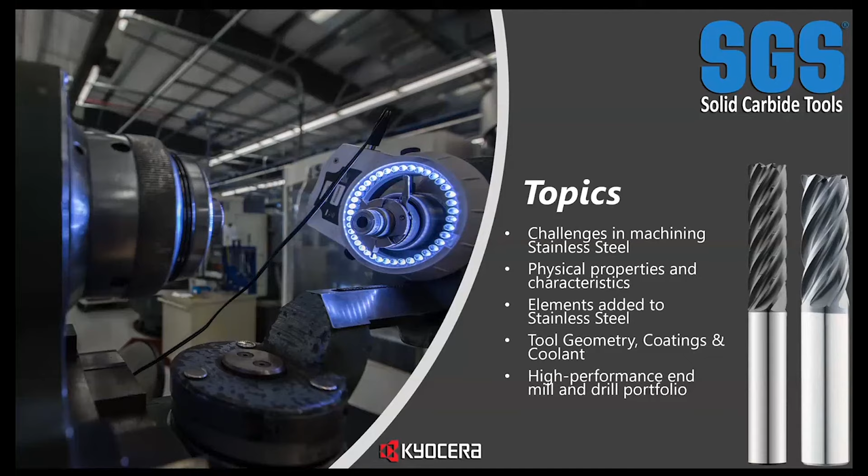So for a material to be classified as stainless, there has to be a 10.5% chromium and 1.2% carbon content or less. The base material here is iron, and certain amounts of other materials or elements are added to change the unique physical properties to suit the needs of each industry or market. For example, materials used in food and medical applications have properties that allow it to be easily cleaned or sterilized. The oil and gas industry or energy industry, on the other hand, uses stainless with additives to protect against highly corrosive liquids and high heat and pressure.

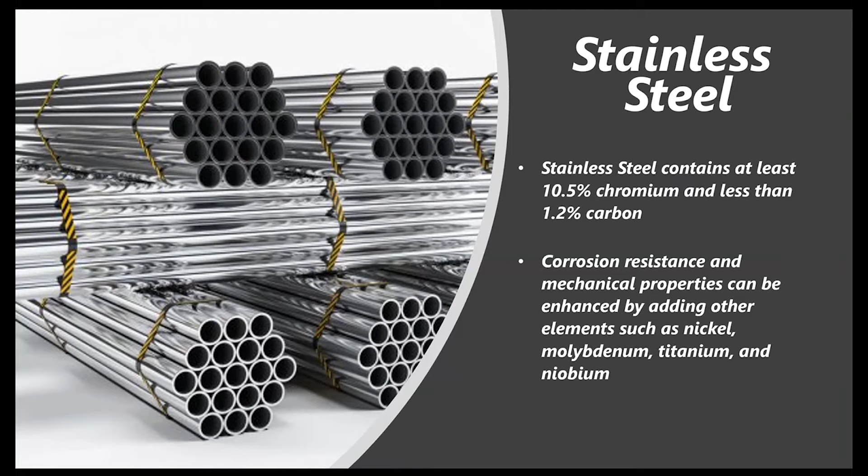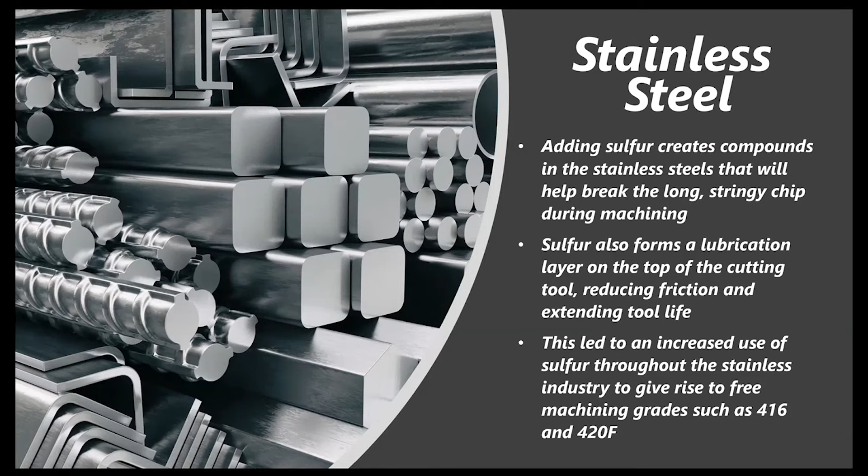So even the automotive and home appliance market uses the stainless steel for the durability and the aesthetics. Depending on what elements are added and how much dictates the tensile strength, melting point, oxidation, and corrosion resistance for each type of those stainless. Sulfur is added at low levels to improve machinability and formability. It will form sulfide inclusions in the material, but these inclusions act as chip breakers. It aids in lubrication by forming a thin layer at the cut surface. The additional sulfur allowed the creation of some more common 400 stainless steels and is used generally with the F designation at the end.

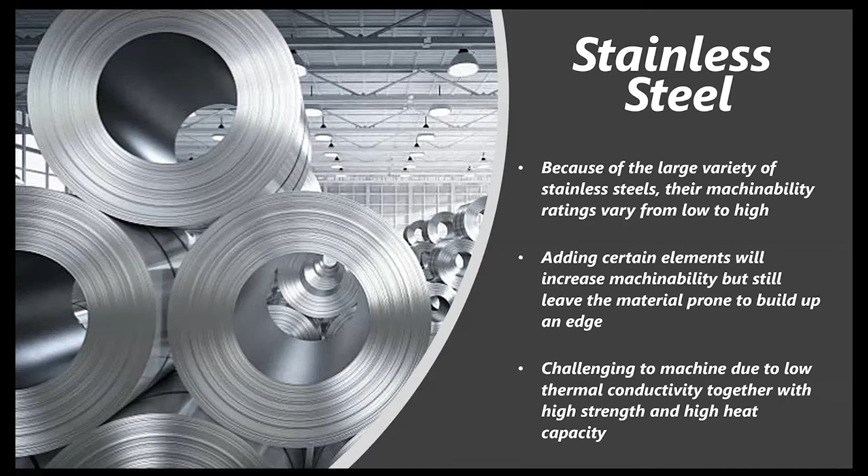Machinability varies greatly in different types of stainless steel depending on the elements added. A condition called built-up edge is when the material adheres to the cutting edge and is usually caused by low cutting speed and work hardening of the material at the point of cut. Increasing the shear or rake angle and the RPM will aid in heat creation, but there are many other dynamics in each type of stainless steel.

Thermal conductivity is the ability of a material to transfer or conduct heat. This is one of the major factors in machining stainless steel, since it has a very low ability to create the heat necessary to form and break a proper chip. So in machining a workpiece with poor conductivity, an increased amount of heat transfers into the tool. This supports the importance of proper coolant flush to carry away heat and chips, and tool coatings, which act as a heat barrier between the tool substrate and the material being cut.

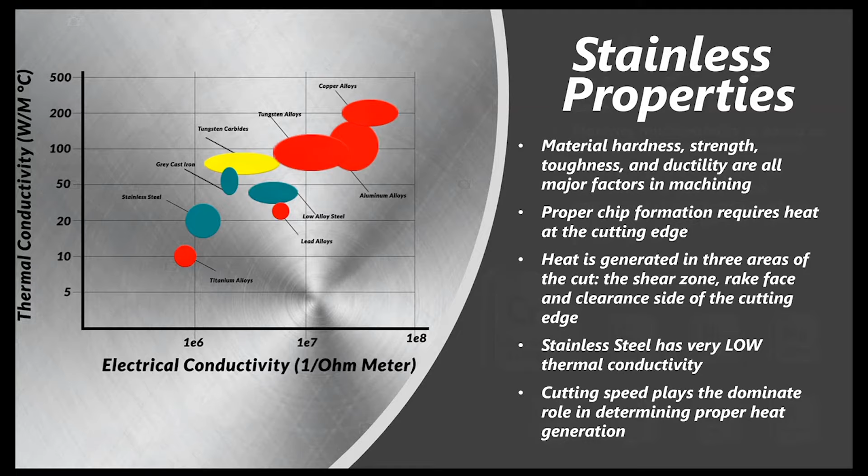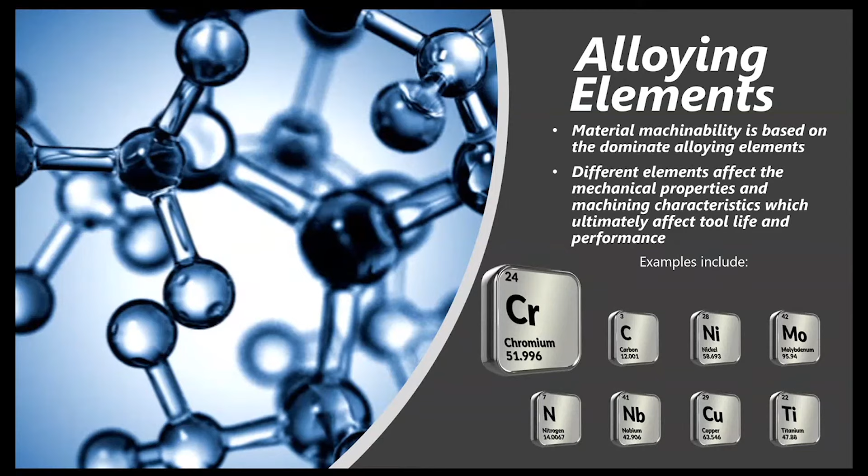So moving now into the elements added to each base material to form the various types. All of these alloying elements can be found in the periodic table. Added in different amounts and at different stages of the material development, each one gives the material the different qualities desired. As more and higher amounts of the elements are added, tool parameters decrease and tool life can be compromised. Of course, first up is chromium. I said earlier that a material must include a minimum of 10.5% chromium to be classified as stainless.

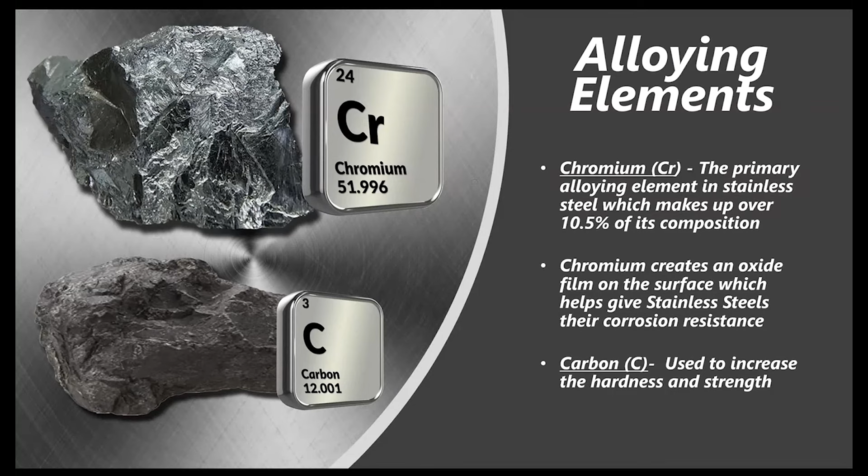During the metal cutting process, iron on its own combined with oxygen creates iron oxide, which is basically rust. When chromium is added, the material has the ability to create a passive film called chromium oxide. This basically stops the formation of rust and creates an immediate barrier when exposed to oxygen. This is the base of all stainless steels. Carbon is added in low amounts to certain types of stainless to increase the hardness and strength. Low carbon types like 304L are used often in welding situations.

Nickel is used in stainless to increase its resistance to heat and corrosion. This can lead to poor chip formation at higher levels and increase the cutting temperature even higher than chromium alone. So adding molybdenum improves the resistance to pitting corrosion, meaning it can be used in more aggressive environments like pharmaceutical equipment, outdoor fixtures and hand railings, marine parts and fittings. The downside is the material has an increased ability to work harden, and sharp geometries are the most effective here.

Nitrogen is used in place of carbon in high strength austenitic stainless steels. Nitrogen has a greater solid solubility than carbon and is a strong stabilizer. It also improves resistance to pitting corrosion.

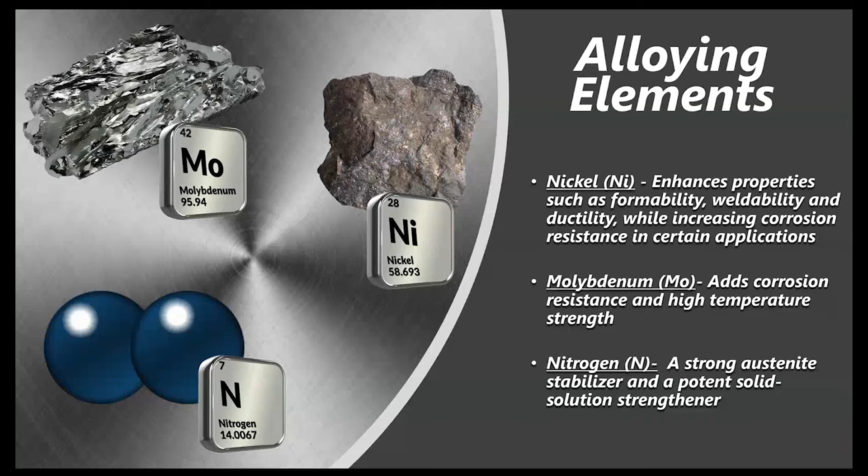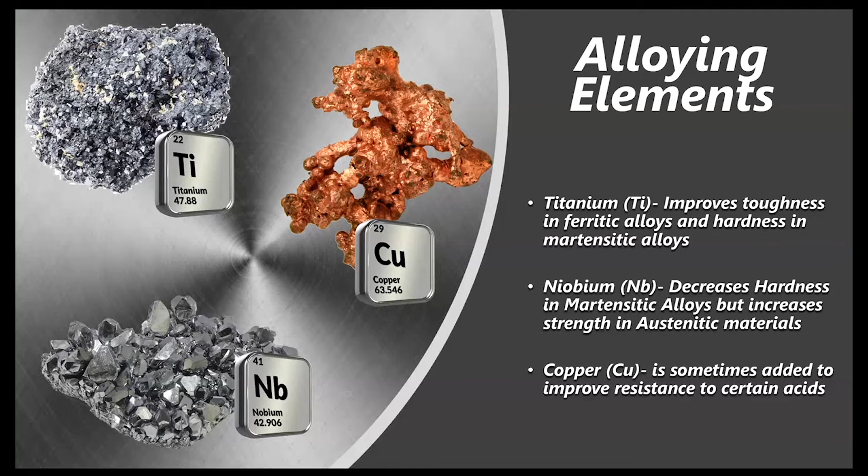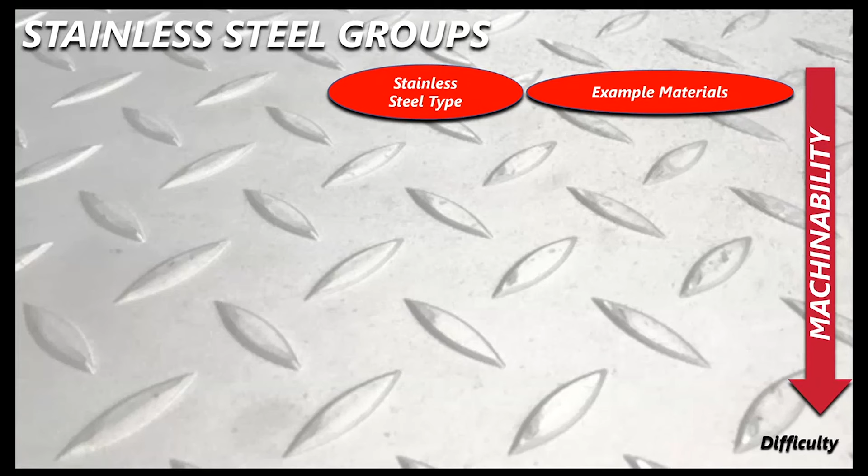Okay, so here's how some of these different types of stainless steels are formed. These are really defined by the alloying elements and the material's grain structure in the end. As I said, the base to all stainless is iron. When we add chromium, we now have ferritic stainless. These are classified in the 400 series, usually with 10 to 30% chromium, and have excellent corrosion and high temperature oxidation resistance. They cannot be heat treated and are always magnetic. So typical applications for this type of stainless include automotive exhaust systems, heat exchangers, and furnaces.

When we take that ferritic material and we add carbon, we get martensitic stainless. Because of its chemical composition, they can be hardened and strengthened through heat and aging treatments. These methods make martensitic steel stronger than other types and a good choice for fabrication of medical instruments, mechanical valves, turbine parts, just to name a few. The PH stainless falls into this type as well.

So we take that martensitic and we add nickel to the mix. We get austenitic type stainless steel. These are classified in the 200 and 300 series usually, and are the most popular grades of stainless steels produced due to their excellent formability and corrosion resistance. They're really used a lot in automotive trim, cookware, food and beverage equipment, and a variety of other industrial applications.

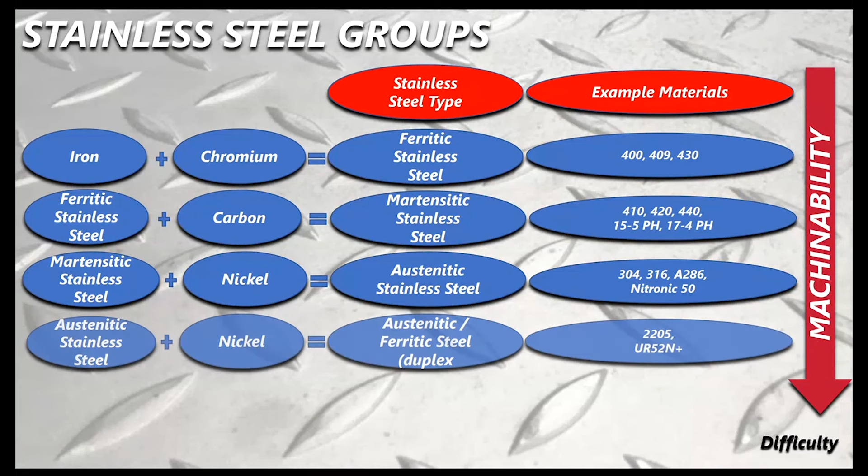Duplex stainless steels are called duplex because they have a two-phase microstructure consisting of grains of both ferritic and austenitic stainless steels. They are almost always double the strength of regular austenitic or ferritic steels alone and have very good stress corrosion cracking resistance. They're used extensively in the oil and gas industry.

Finally, the super austenitic type. These fully austenitic grades give excellent corrosion and stress cracking resistance. They may also be a lower cost alternative to nickel-based alloys, depending on the application. Super austenitic grades are usually for wastewater treatment and chemical applications.

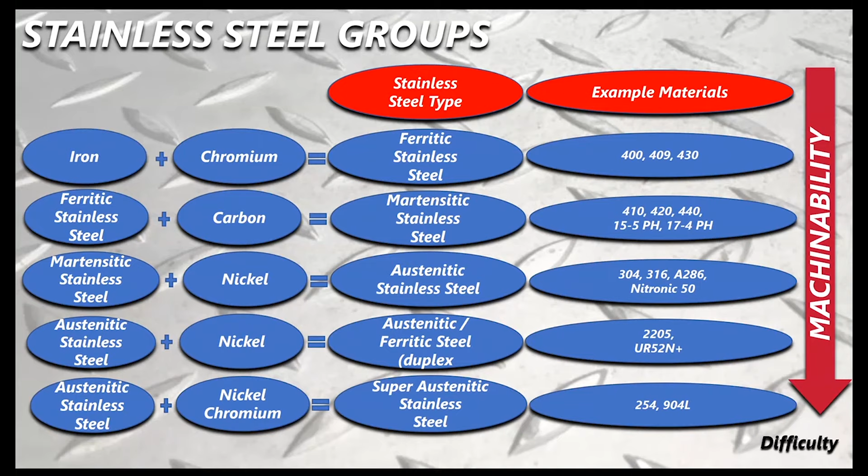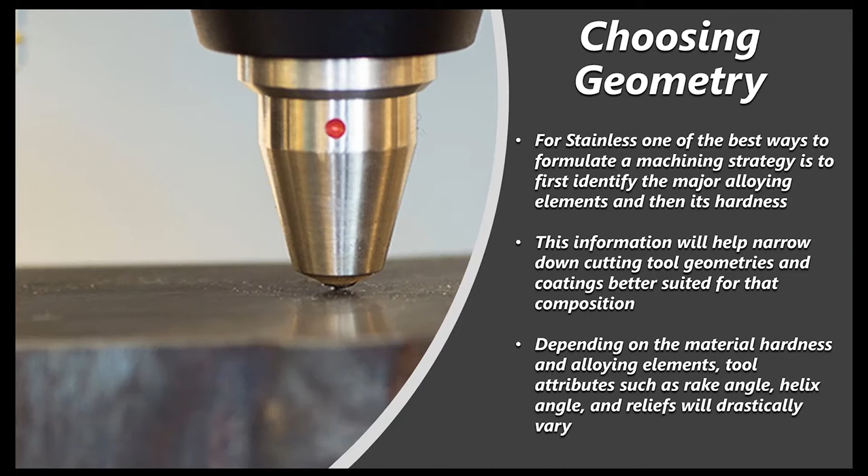So to choose the correct geometry for any stainless, we need to understand the content and type of alloying elements that are going into it. Hardness and toughness will always be an important factor. Once we understand those traits, we can apply that knowledge to identify the cutting tool and the type of tool path we need. The tool's attributes can help or hinder the ability to make or break a chip. The coating is also really important for added lubricity and to reduce the amount of heat back into the tool.

We generally apply a positive rake to stainless steels. This sharper edge will shear the chip and reduce friction, which in turn will reduce heat at the cutting zone. If the tool is too sharp though, we sacrifice the edge strength needed for added tool life. So we have to find a balance for the two features for best results.

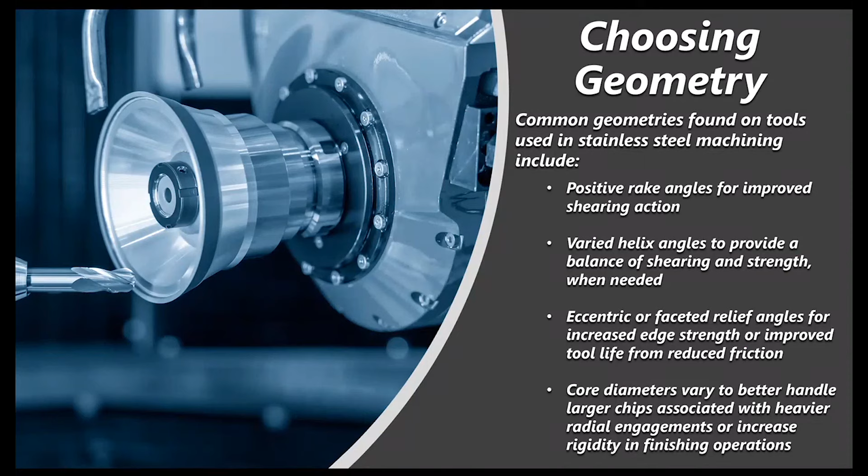Eccentric ground relief angles provide additional strength and give a sharper cutting action. Traditional facet reliefs are much sharper and will work for a short time, but they wear quickly and they reduce tool life. So variable geometries like unequal flute spacing and changing helix angles reduce vibrations and enhance the tool's performance. Flute count is usually based on tool path and type of operation for balance of maximum material removal and tool life. Using high efficiency trochoidal tool paths will reduce the amount of heat generated and can be very effective in machining stainless steels.

The coating on a tool has a few different functions, but in the case of tough stainless steel, we use it as a heat shield. Uncoated carbide exposes the substrate and heat will quickly break down the binders in the carbide. We also use advanced PVD and nano coating to create that slick surface for the chip to slide across, and that in turn reduces heat.

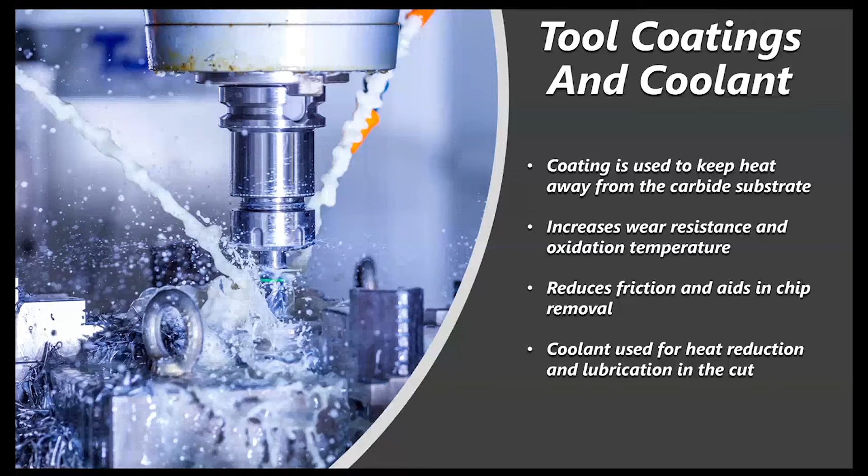Coolant should be applied when machining stainless whenever possible. Using coolant ensures that the friction between the surface of the cutting tool and the material is reduced, and lubrication significantly enhances the metal removal process.

So I mentioned earlier that we grind and coat over 11,000 tools a day. At SGS, we also have our own coating chambers and formulas. Everything is manufactured and coated under one roof. We offer several high-performance coating solutions that work well in stainless.

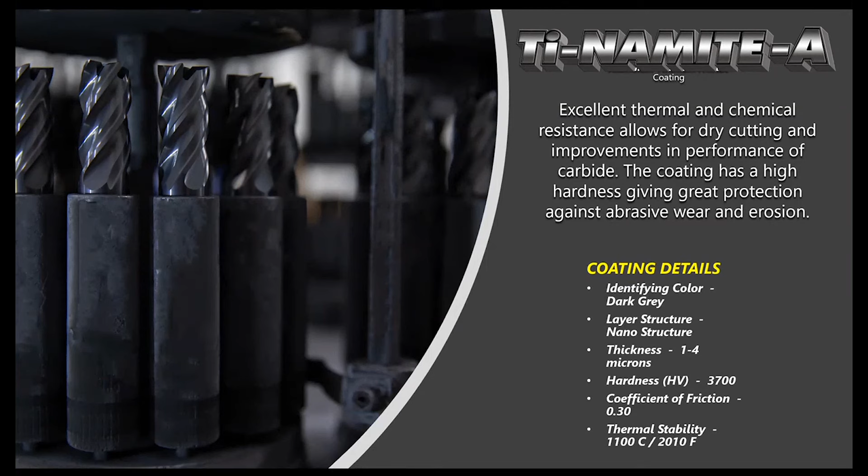The first one is what we call our Ti-NAMITE-A, or TA. This is an aluminum titanium nitride nanostructure PVD coating. This coating provides a very thin, hard heat barrier. It gives added protection from erosion and abrasion. It's perfect for machining stainless steel.

Ti-NAMITE-X, or TX, is our proprietary high-performance nano composite hybrid. It works well in a wide range of materials and applications. It can also withstand high cutting speeds and temperatures.

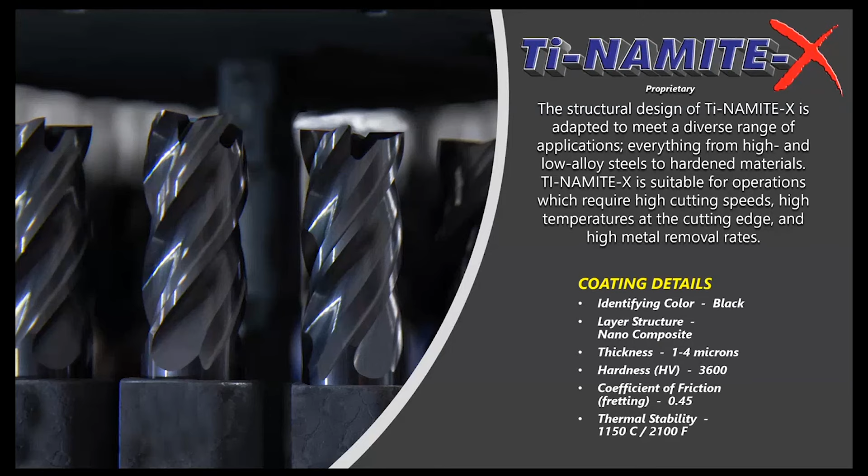And finally, this is our proprietary Ti-NAMITE-M, or TM. It's based on a titanium aluminum silicon nitride, and it's easy to identify by its color. That will also offer high hardness for protection against erosion and abrasion. And it's an excellent choice in machining titanium and stainless steel.

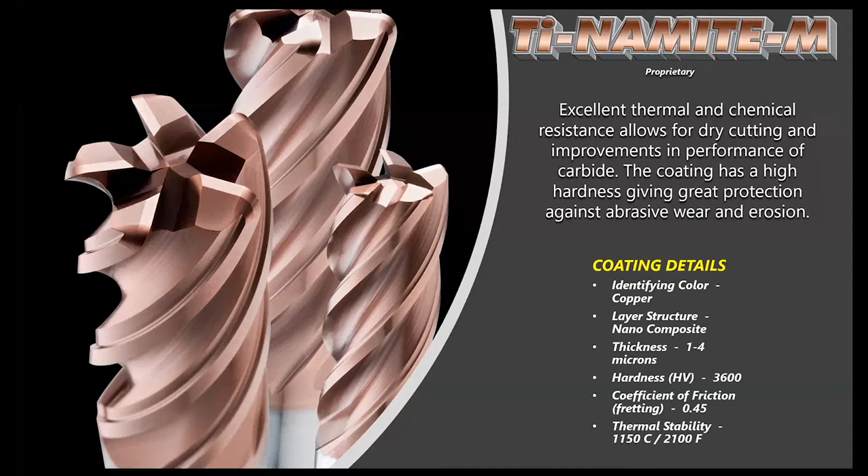So I'm going to move now into the SGS portfolio of high performance tools that we can apply to the stainless. Each one has different advantages over the other depending on the application and the type of tool path we'll be using.

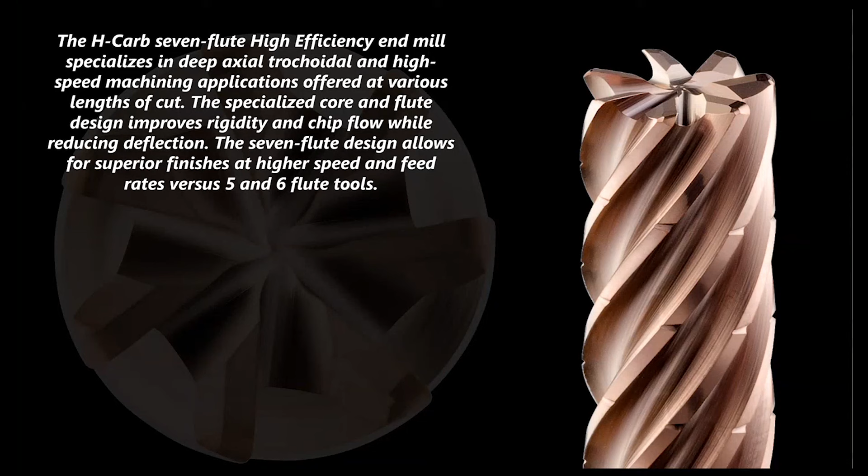First up is our most recent addition to the SGS family of high performance end mills. This is the Series 77, or what we call the H-carb. This 7-flute end mill has an eccentric grind with variable flute spacing. The tool has an optimized core diameter for increased rigidity in the longer lengths of cut. We also offer this tool with chip breakers as a standard. This will aid in stainless steel and create a smaller, manageable chip.

So this end mill is designed to be coupled with the latest CAM software that utilizes the constant cut method of programming. Software has many variations or names, but a few common ones are Mastercam's dynamic milling and GibbsCAM volume mill. Another common term used is trochoidal milling, where the end mill uses a circular motion to create a large swath or slot.

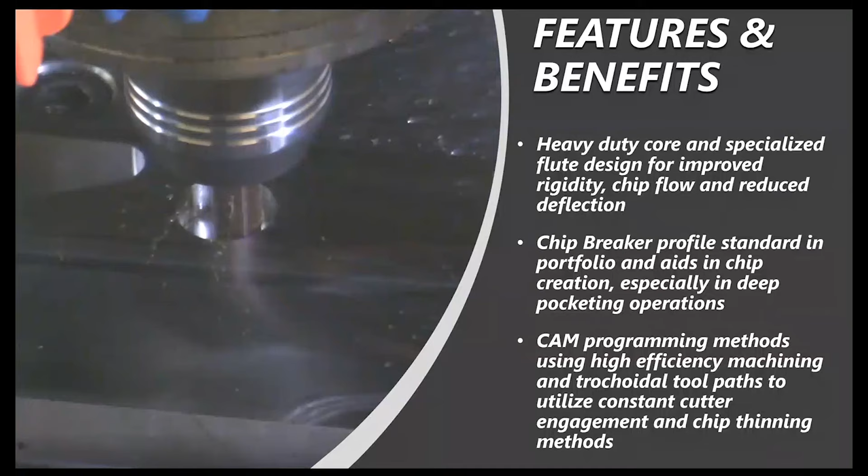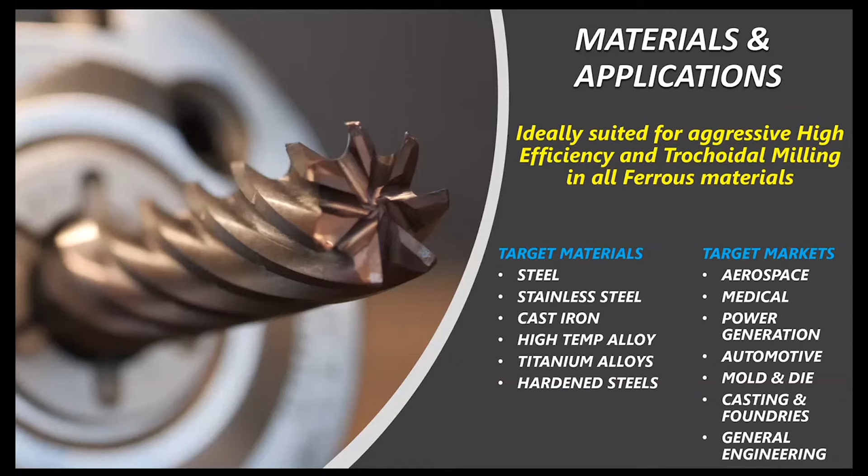The offering includes over 500 items with fractional sizes ranging from 1/4 inch to 1 inch and metric from 6 to 25 millimeter in diameter. The length of cut options for this series include 2.5, 3, and 4 times diameter. We stock square corner, corner radius, and chip breaker as a standard catalog item. Two coating options are available with TA and TM.

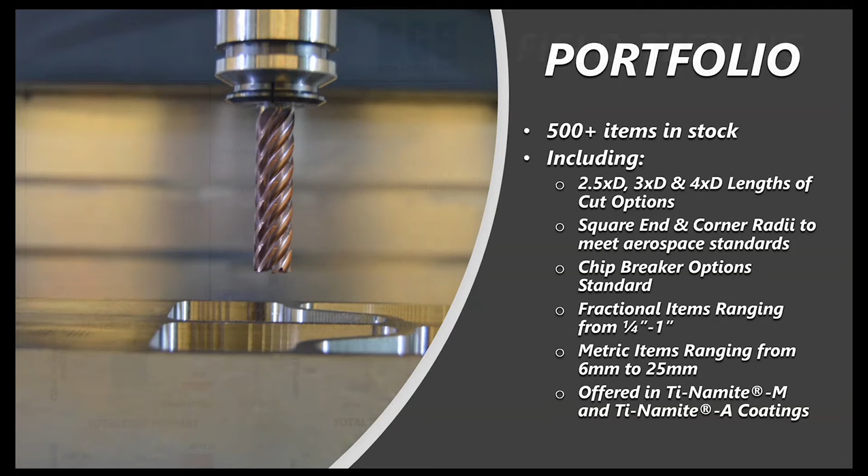So here at SGS, we are committed to saving the customer money. While we rarely win a test based solely on price, we must constantly justify and document cost savings at the spindle. It's all about cost per cut.

This is a recent case study based on a cost savings we offered a customer in 13-8 PH stainless. They were originally using a 2-inch face mill, and they took a very light 25 thousandths axial depth of cut per pass. We used a 5/8 diameter H-carb and took the full 1 3/4 axial depth, but reduced our radial engagement to 10%. While the tool cost for the H-carb was significantly higher than the indexable inserts, we went from 15 to 60 parts per tool.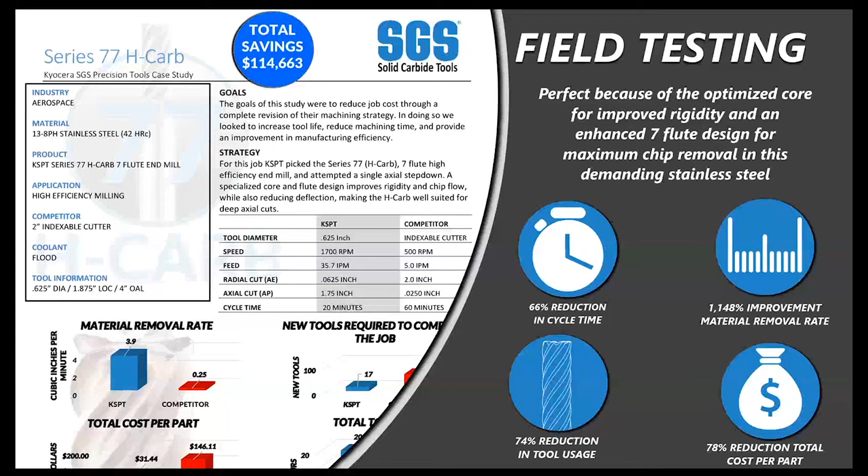Our material removal rate also jumped from 0.25 to 3.9 cubic inches per minute, which brought the customer cost per part from $146 to only $31. So in the end, we saved the customer over $114,000 on this one job.

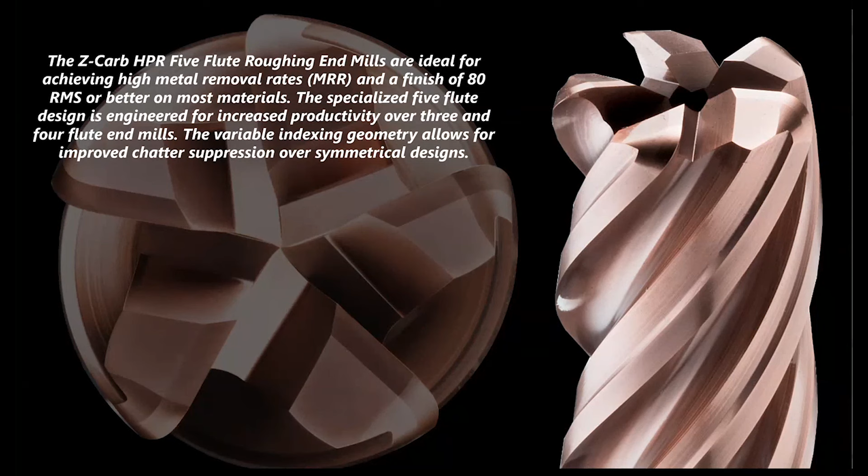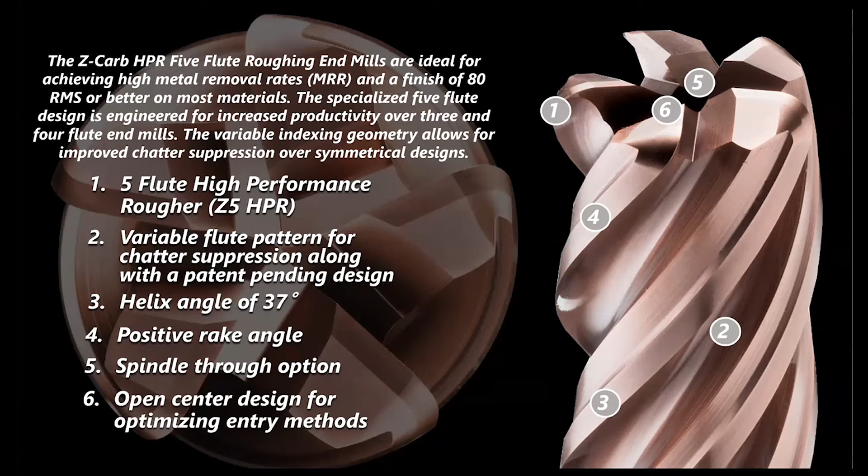So next we have our most popular Z-carb ever, the 5-flute HPR, or what we call the high performance rougher. This is the 5-flute version of our flagship Z-carb end mill and has an eccentric grind with variable flute spacing. The tool has unique end geometry optimized for ramping up to 5 degrees in most materials. We also offer this tool with a central coolant hole on select sizes over 1/2 inch. This is really useful when helical ramp milling and pocketing into tough stainless steel alloys.

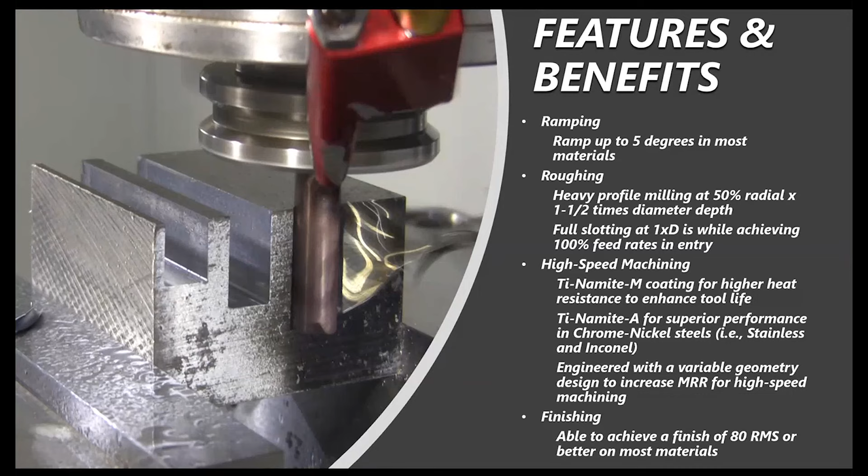This end mill is very versatile in the sense that we can perform full diameter slotting and side finishes down to 80 RMS when needed. Robust edge strength allows heavy radial and slotting up to 2 times diameter in certain applications. Very efficient using typical G-code programming or trochoidal tool paths. Like the H-carb, we offer this tool with the 2 coating options. This end mill will excel in stainless using the TA coated option coupled with the through coolant design when needed. Again, every market listed here will machine some form of stainless.

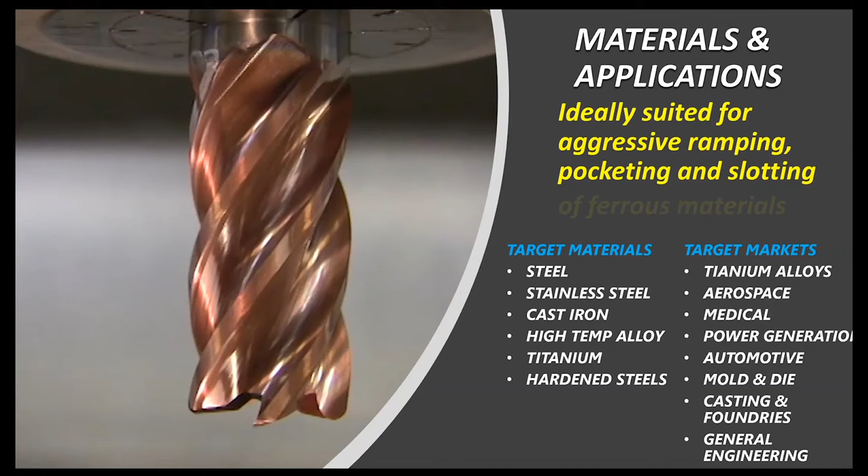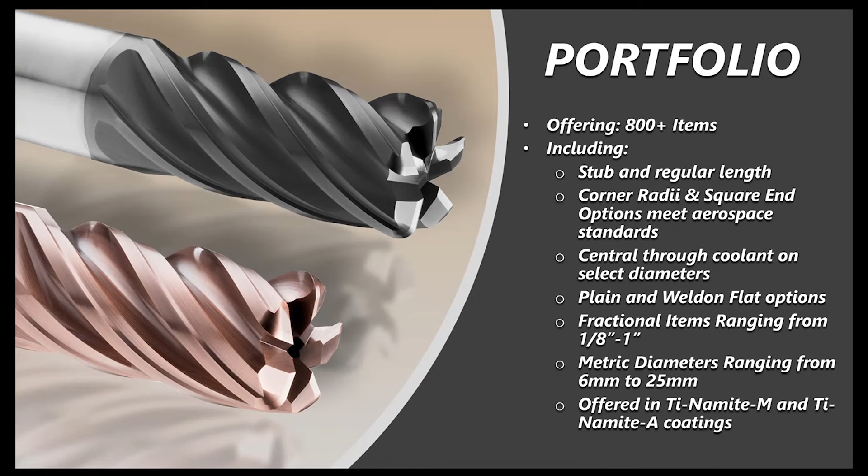The offer includes over 800 items with fractional sizes ranging from 1/8 inch to 1 inch and metric from 6 to 25 millimeter in diameter. Length of cut options for the series include 1, 2, and 2.5 times diameter. We stock square corner and corner radius as a standard catalog item, and we have the 2 coating options as mentioned with TA and TM.

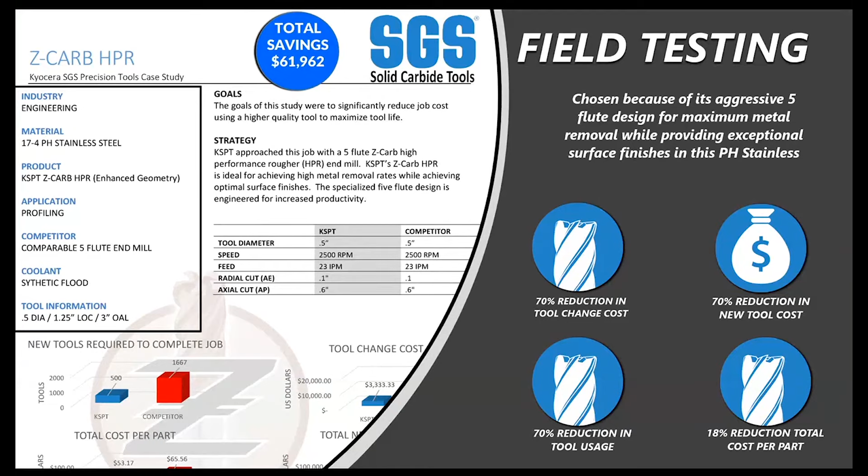SGS won this test by increasing the tool life, going from 3 to 10 parts per tool. So this reduced the overall tooling cost from $76,000 down to only $22,500. And in the end, we saved the customer almost $62,000 on this one job.

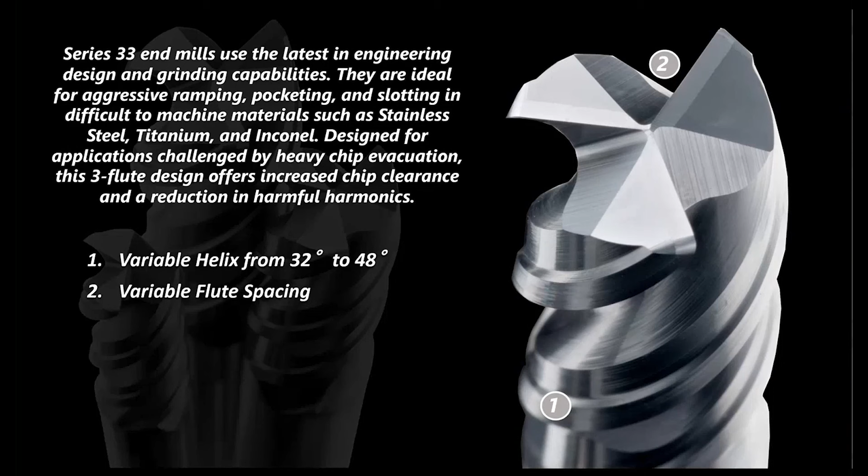So here's a unique 3-flute tool originally designed for stainless steel applications, the Series 33 end mill. This 3-flute high performance end mill has several attributes that make it perfect for heavy material removal in stainless steel. We start with an eccentric grind with variable flute spacing. We had a variable helix ranging from 32 to 48 degrees. That feature allows us to incorporate a stepped core for added side load strength. The tool has a unique end geometry called symmetrical gashing, where all 3 flutes come to the exact center of the tool. Makes it very, very strong.

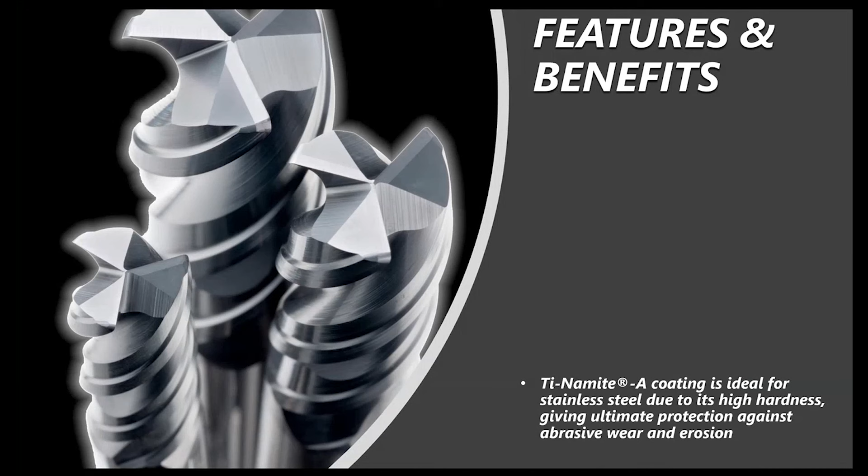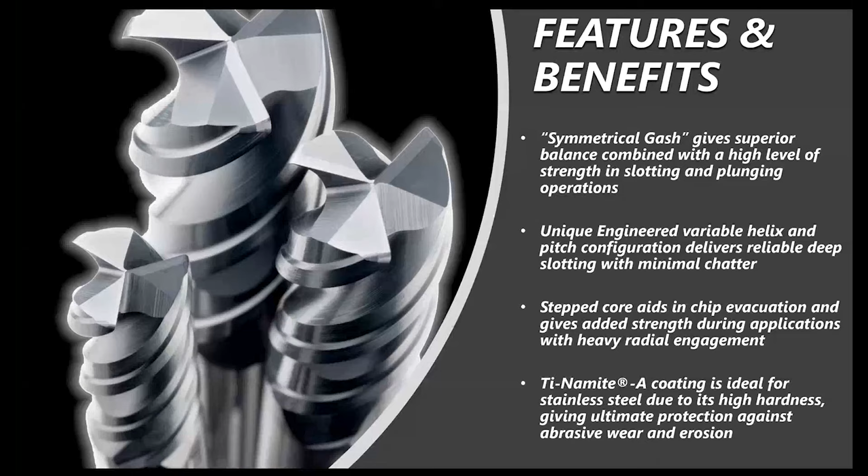And although it only has 3 flutes, this end mill has proven to be an excellent choice in all stainless applications, but especially for low horsepower machines and unstable setups. Tough edge strength allows full slotting up to 1 diameter deep in tough alloys. The chips created are pulled up and out of the cut to make pocketing a really easy task. This tool is only offered with Ti-Namite-A coating. It will excel in stainless steel, especially in slotting and high ramp applications. It will fit into all markets listed and can be used in any ferrous metal.

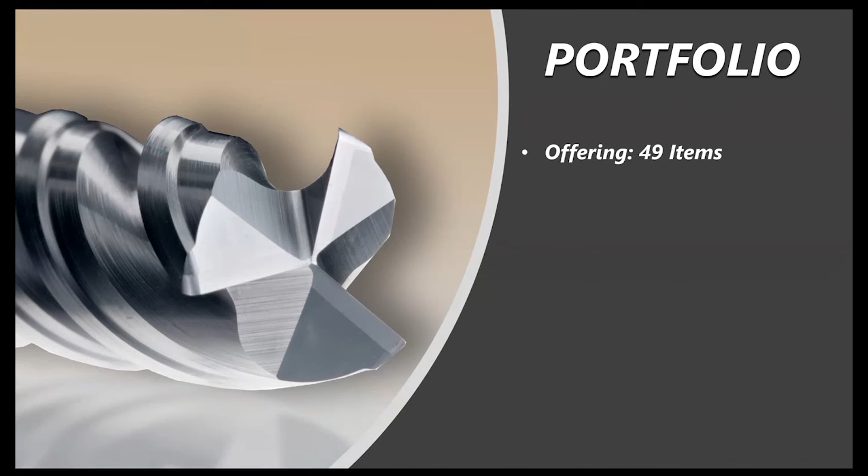With a small fractional portfolio from 1/8 to 1 inch, keep in mind these tools are targeted for roughing. We have a limited offer on diameters and corner radii by design. Metric options are slightly larger because of our global presence and the popularity in Europe. Again, TA coating only.

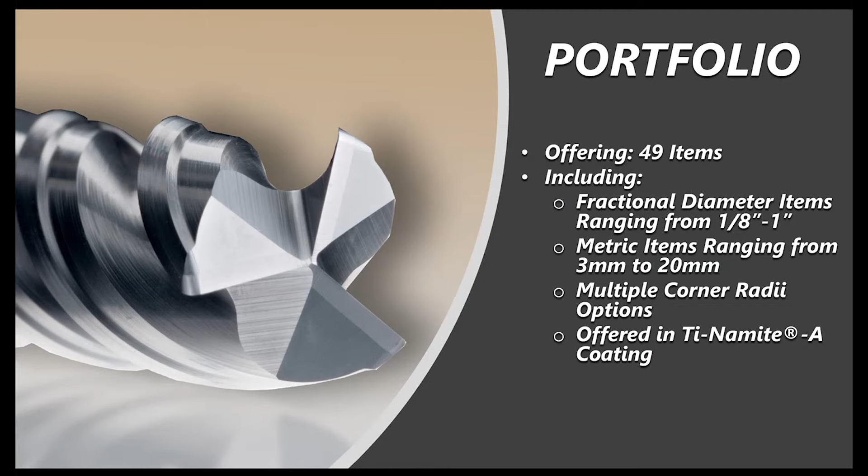So this test was performed in 316L stainless in the power generation market. This part was a large 6-foot spur gear with 144 internal teeth, and the customer was using a competitor's end mill to rough the tooth profile. With the slotting capabilities of the Series 33, we were able to cut the number of axial passes in half and double the feed rate in the process.

The tool cost was similar, but the material removal rate jumped from 1.66 to almost 5 cubic inches per minute. And tool life was also increased from 3 tools per part to 2 parts per tool. So that equated to a 500% increase. In total, the customer realized about a $20,000 cost reduction based on only 46 parts per year.

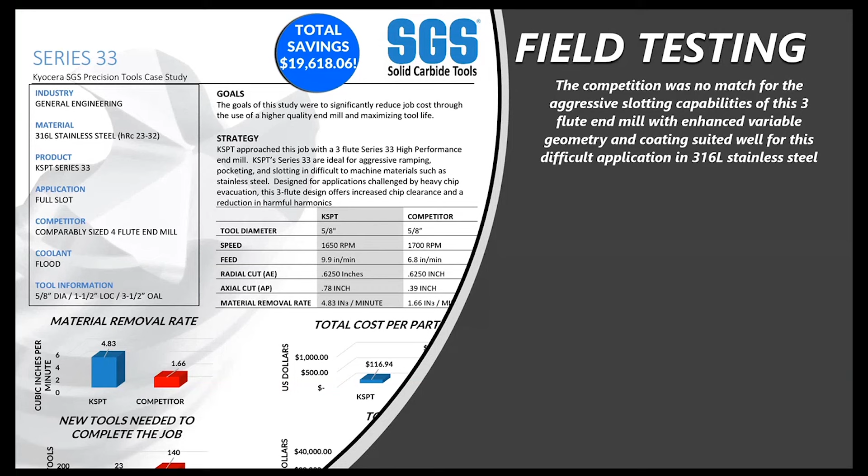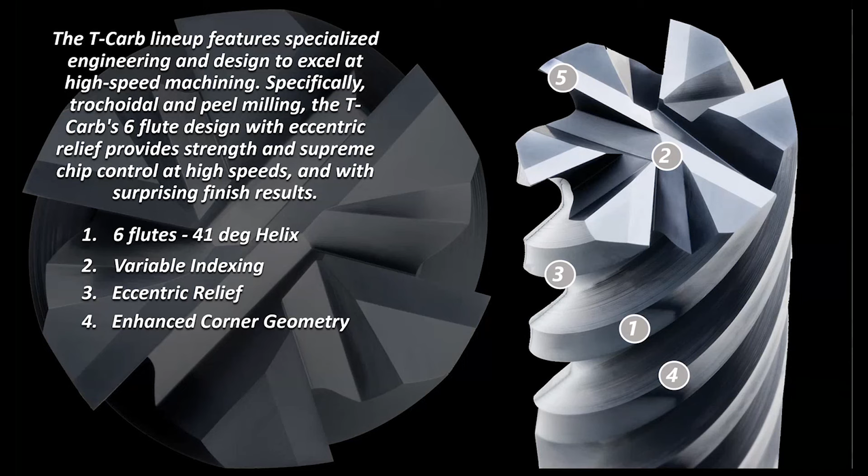And next up, we have our T-carb or Series 51. This end mill features 6 unequal flutes with a fairly radical eccentric grind for edge strength. The 41-degree helix works very well in stainless applications using high-speed machining methods. The enhanced 6-flute design of the T-carb end mill offers virtually chatter-free machining. Center cutting allows for ramping up to 3 degrees in most materials. It excels in titanium and stainless steel using the trochoidal or helical interpolation tool pass. Also a great multiple flute tool for finishing in all ferrous materials.

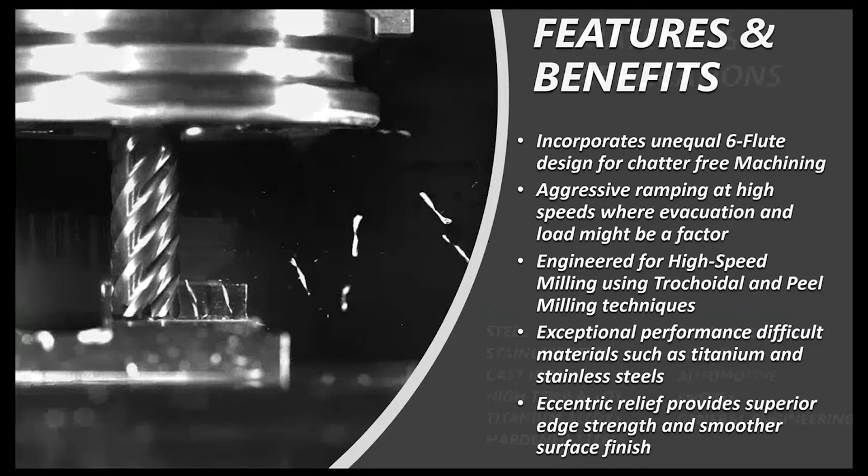This tool is only offered with the Ti-Namite-X or TX coating option. Applying similar materials to the H-carb and HPR using the light radial passes at exceptional feed rates, similar programming methods. This tool can be used in all ferrous materials, and every market listed will machine some form of stainless, as I said before.

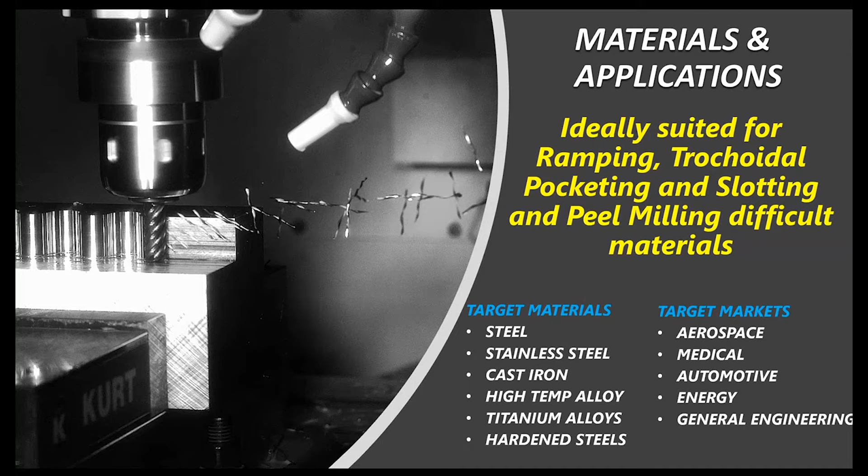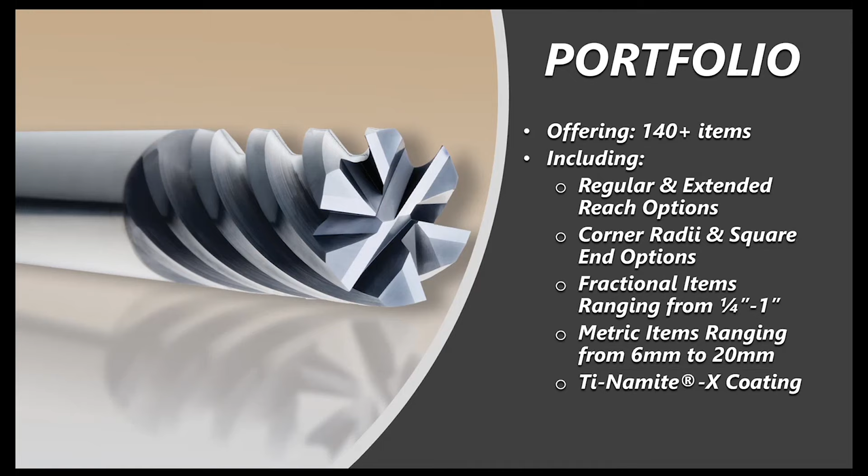The offer includes over 140 items with fractional sizes ranging from 1/4 to 1 inch and metric from 6 to 20 millimeter in diameter. Length options for this series include standard 2.5 times diameter length of cut, and it's also available with a stub length of cut with a neck relief for long reach applications. We stock square corner and corner radius as a catalog standard item. And again, it's offered only with TX.

This case study is based on a cost savings we offered a customer cutting A286 stainless in aerospace. They were using a competitor's 5-flute end mill with a trochoidal tool path. Both end mills were half-inch diameter, programmed to take 540 thousandths axial depth of cut with a radial engagement of about 7%.

Tool cost for the SGS end mill in this case was slightly less, but we did increase the chip load from 0.0018 to 0.0034 inch per tooth. So that equates to going from 15 to almost 28 inches a minute. SGS won this test based on the reduction of cycle time, and in the end, we saved the customer almost $40,000.

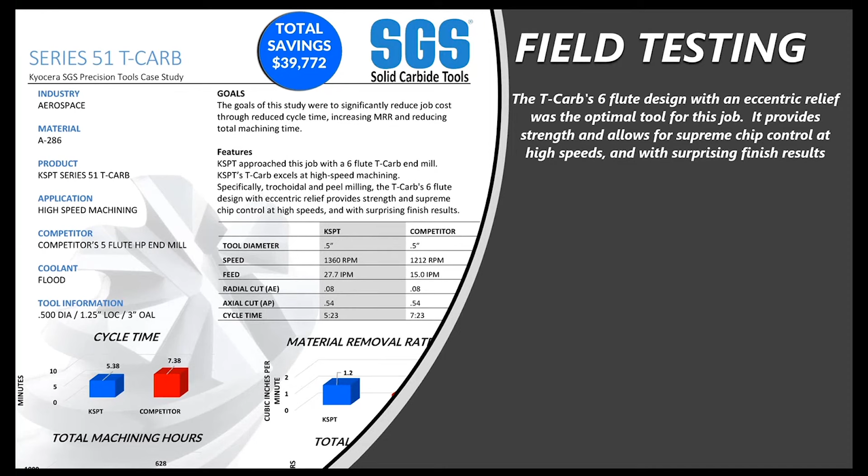Moving now from end mills to our most popular drill, this is the Hi-PerCarb Series 135. We offer some very unique features on this high performance drill, with the most important being that it's a double margin design. You notice a secondary gullet behind the primary flute. Top it off with a very robust 145-degree notched point and enhanced edge protection.

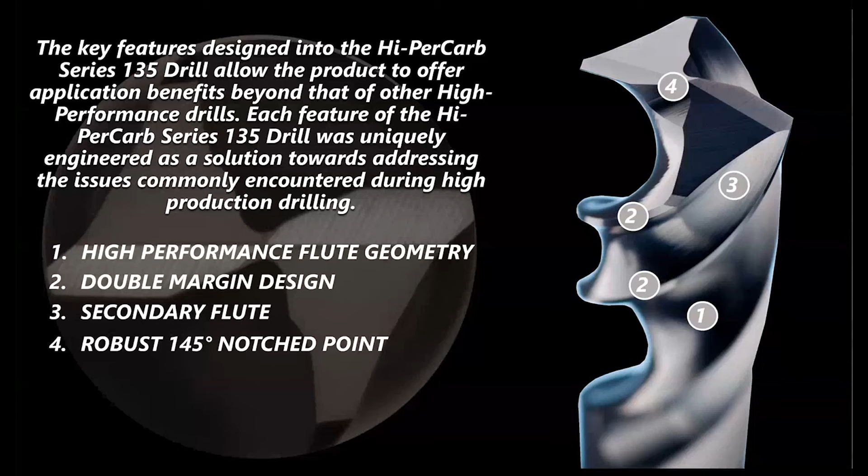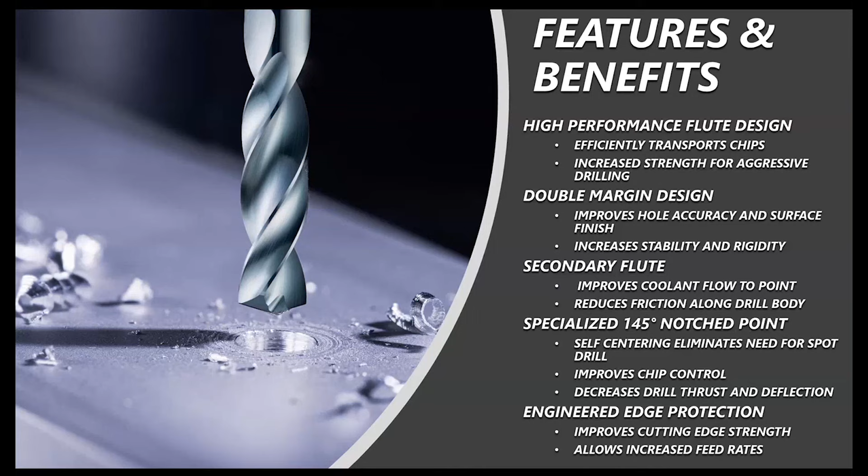The high performance flute design coupled with the double margin gives the drill the ability to create a reamer quality hole without through coolant. The coolant is delivered to the cutting edge by the secondary flute between the margins. The specialized point allows high penetration and low thrust, thus reducing horsepower at the spindle. This drill also excels in cross-hole and core hole applications because of the strength of the core and the cutting edge. Materials include all ferrous and even non-ferrous applications in every market segment.

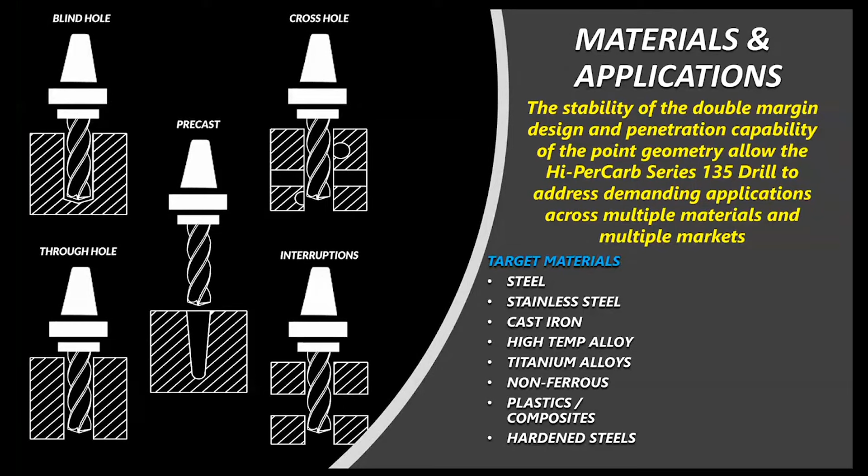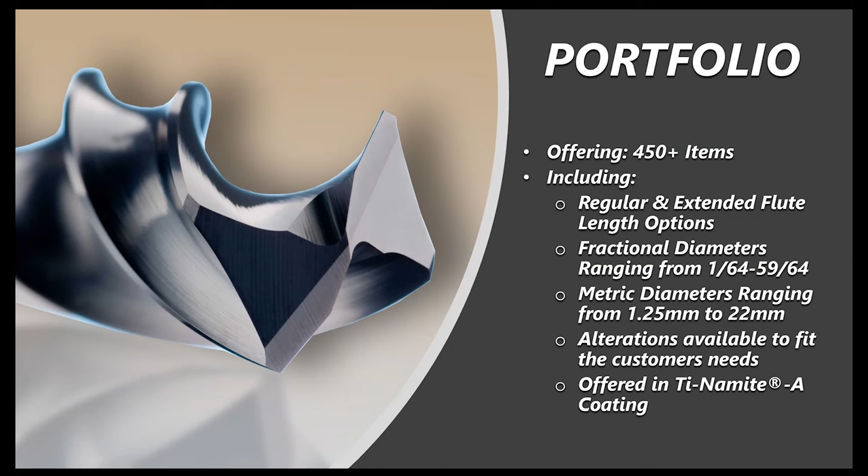The offering includes over 450 items in 3 and 5 times diameter length of flute, in mixed fractional and metric sizes ranging from 1/64 to 59/64 on all common fractional and metric shanks. This unique drill is only offered with Ti-Namite-A coating.

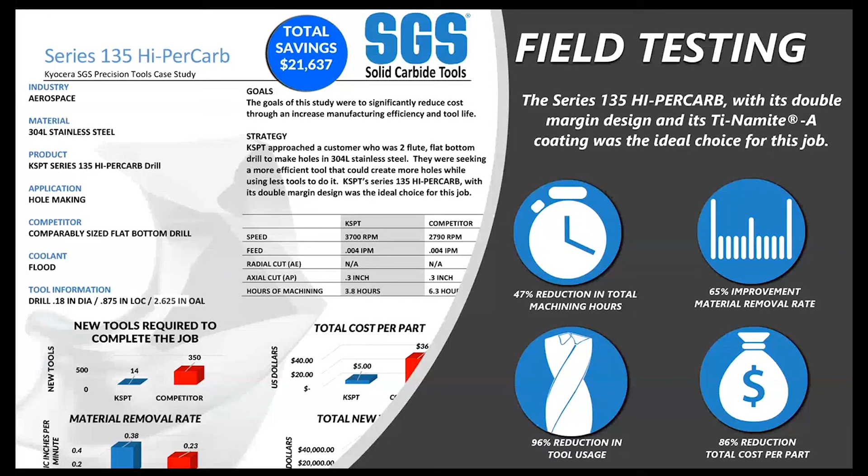This final case study is based on a cost savings we offered a customer in 304L stainless. They were using a competitor's solid carbide drill with flood coolant. Both drills were 3/16 diameter, programmed to take a short .300 axial depth of cut. Tool cost was similar, but the running parameters went from 2790 RPM at 4 thou per rev to 3700 at 4 thou per rev. SGS won this test by reducing the cycle time and increasing tool life, going from 2 to 50 parts per tool. That reduced the overall tool cost from $21,000 down to $835 for that job, and in the end, we saved the customer almost $22,000.

I need to point out here that every case study you saw today and all case studies for every application are available to download as a PDF from our website. They're stored under the Resources tab. They can be researched by industry, material, or SGS tool series. These case studies can be used at all levels of manufacturing to spur conversation with customers or management, even to qualify the need or desire to find a better solution. So print them out, share them with colleagues, and use them to really shine a light on opportunities for improvement.

To wrap this up, let me summarize the things you need to successfully machine stainless steel materials. First, understand the alloys and the hardness of your specific material. Next, determine the type of machine and tool paths you use to run the job. Third, select the type, geometry, and coating of the tools you need based on the material makeup and the tool paths you selected. Number 4, confirm starting parameters by catalog rates or use online calculators.